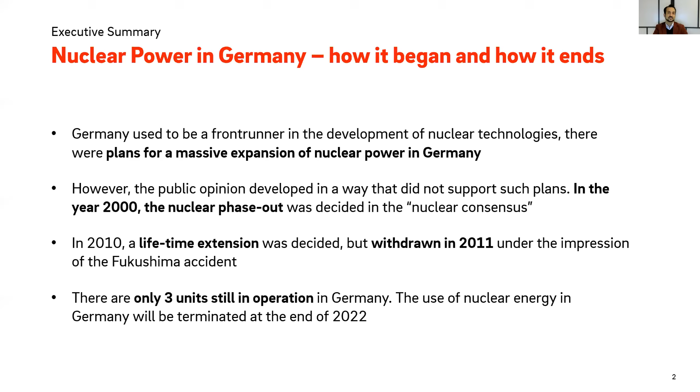I will guide you through the development of nuclear in Germany, and then you will see the decisive points where in Germany other decisions were made than in other countries. But why me? I'm not in nuclear anymore, but I used to be. I used to be at RWE when the most important decisions were made concerning first lifetime extension, and then after the accident at Fukushima, the more restricted phase-out policy in Germany.

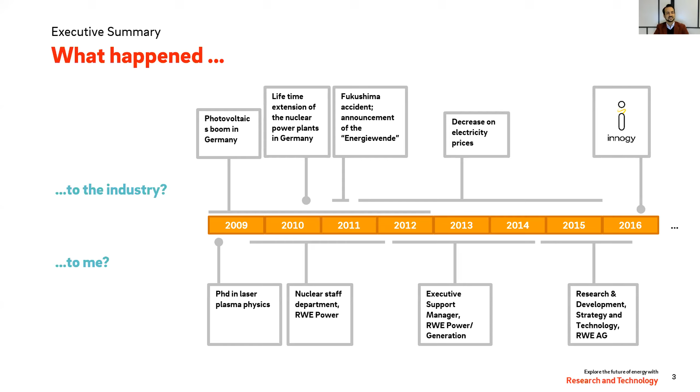And at that time, I did a lot of executive support. I was in a staff department, and I was also executive support manager. So it was a pretty stressful time, but it was also a very interesting and an intense experience. And hopefully I can share a little bit of that today. And I have to say, I'm not a historian, I'm a physicist. So what I'm telling you is mostly from memory. So forgive me if it's not as, let's say, neutral as a historian would do.

But starting at the very early beginnings of nuclear in Germany, I would like to say that Germany used to be a front runner in the development of nuclear technologies and nuclear sciences. I just gave you one example, which is the pebble bed reactor, a design that was pushed forward in Germany. And even though the implementation of that design was, in the end, not successful, as you can see in the middle picture, it still influences the industry today. China has just commissioned a pebble bed reactor in the last year. And they say it's first of its kind, but actually it was done before, especially also in Germany.

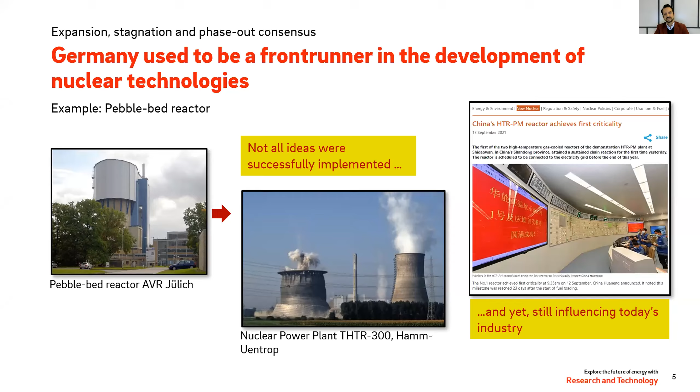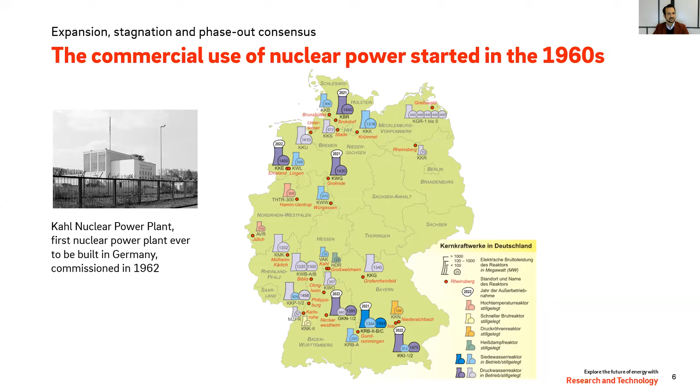And it was not only the science, it was also the industrial development of nuclear power, and the commercial use of nuclear power started in the 1960s. But it was not completely without obstacles. For example, RWE was reluctant to enter nuclear power. We have some historical documents that show that the company was afraid that the overall costs of nuclear energy could not be calculated. So they actually didn't want to enter nuclear power in the first place, but they were pushed by politics. And so they entered this technology, and a decent number of nuclear power plants were built in the 1960s and 70s in Germany. But the decisive point basically came in the 70s in the wake of the oil crisis from 1973.

At that time, there were plans for a massive expansion of nuclear power in Germany. Here you can see former German Chancellor Helmut Schmidt, and his rationale was basically that we would have to go away from oil because of the dependence on imports. And you can see what he said in 1979 here: the burning of any kind of hydrocarbons leads to a dangerous heating of the globe. So he was against the extended use of coal, and he also said that the development of renewable energy sources would not be feasible in the forthcoming 30 years.

And so he said: in 2010, we will no longer have oil, then all cars will run on batteries. For that, we need nuclear power plants so that we can charge the batteries from the socket. And it's really astonishing how similar these arguments from that time are to the arguments that we have today. But you have to take into account that at the end of the 70s, that must have sounded a bit like science fiction to the people. So that was a really intellectual point of view of things. But it was not science fiction. The technology was already there.

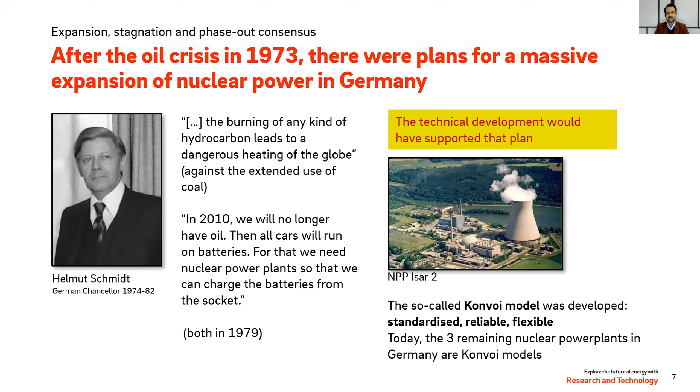But as you know, these plans were not implemented. And why didn't it happen? In the 1980s, skepticism grew in Germany, just like in other countries. But in Germany, it was somewhat more severe than in other countries. In 1979, as you probably know, there was the Three Mile Island accident in the United States. And at that time was also the formation of the Green Party in Germany in 1979 and 1980.

And in 1986, there was the Chernobyl accident. And at that time, there was a growing atmosphere of mistrust. What we saw was that there was a gap developing between supporters and anti-nuclear activists. So on the one hand, you had these elites of politicians, people from industry and from science. And on the other side, you had this grassroots development.

And the people from this grassroots development were not really seen as equals in the discussion because they were no experts. And that caused, let's say, this trench to grow, and we had this polarization in Germany. For example, as you can see here on this image from 1986, excessive police force was applied to activists. From today's point of view, this image looks really disturbing. But it also shows how the polarization in the society grew. And that was a mistake.

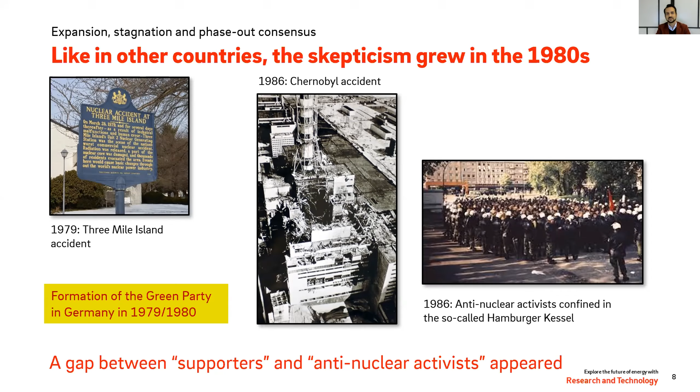So when the Green Party was in the federal government for the first time in 1998, it was finally negotiated how the nuclear phase-out in Germany could be done. At that time, the government put a lot of pressure on the nuclear operators, because the government could have prevented continuing operation of nuclear power plants just by not giving permits, for example, for nuclear waste transport. So they could have just stopped the operation by not giving permits. And that, of course, put a lot of pressure to finally have this consensus negotiated with the nuclear operators.

And this consensus was actually quite a piece of work. It was a smart idea to do it in the following way. The power plants in Germany received a certain amount of electricity that they were still allowed to produce until the end of their operation. So each plant could produce a certain amount of electricity, and when this electricity was used up, it would automatically lose its permit for power operation, and then it was over. That was more or less irreversible, because applying for a new permit for an old plant is usually not possible. So once you lose your permit, it's over.

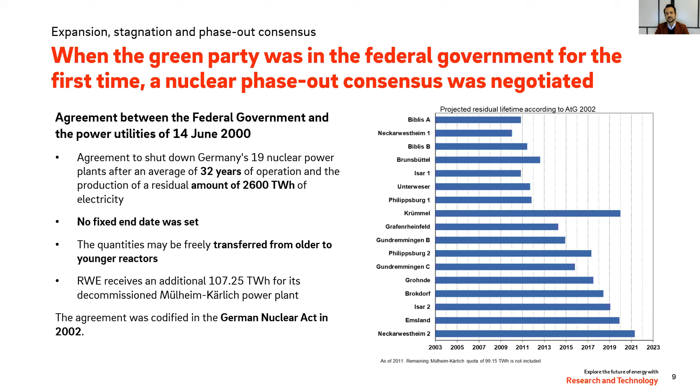So it was only that, as we see in the next chapter, the government changed over time, and at some point decided to have a lifetime extension, just to buy a little more time for the nuclear power plants in Germany. The idea was never to revive the nuclear industry in Germany or to build new plants. It was just to make the transition into a renewable future easier, for three reasons, basically. The first one being the nuclear power plants would facilitate CO2-free production of electricity. Second, they could keep electricity prices at bay to some degree.

And the third one is that the extra profits from the continued operation of the nuclear power plants could partially be used to finance support for renewable projects or climate protection projects. About half of the additional profits would have been transferred to the government, to governmental funds, and these funds could have been used for climate protection purposes. So that was the idea, just to facilitate this transition. And that was also the time when I started in the nuclear industry.

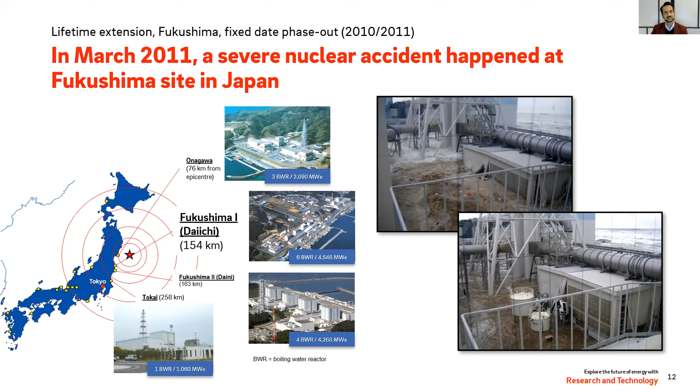And so the question was, how did that affect Germany? And it did, although obviously we do not have tsunamis in Germany. There was a perceived urge to do something about nuclear energy in Germany as well. And the immediate action of the authorities and the government was that they halted the operation of 8 nuclear power plants, which was called atomic moratorium, if you like, and did a safety assessment of all of the nuclear power plants in Germany.

Of course, it was actually surprising that you would halt the operation of nuclear power plants in Germany because of an accident that happened in Japan that was not transferable. But at that time, it was like this, and these 8 power plants didn't start operation again because there was a renewal of the German Atomic Act, which then fixed the dates of the shutdown of the individual power plants.

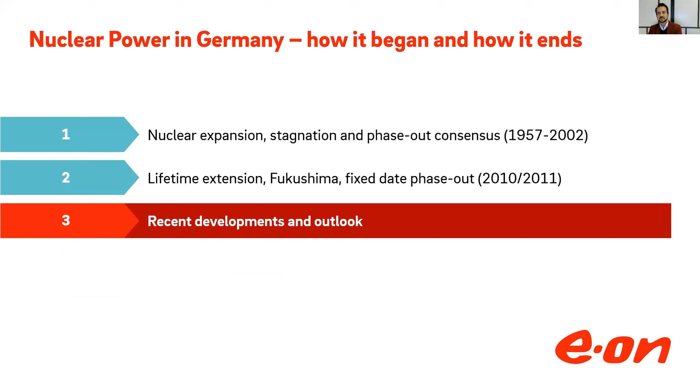And so the activists focused on other topics, especially on lignite in Germany, and you could see really very fast that they changed from one side to the other side, and there was this occupation at the open cast lignite mining plant. And this, of course, is an ongoing topic in Germany. Yes, so that was it basically for, let's say, the wild days of nuclear power in Germany. And so the dust has settled more or less.

And in Germany, we already have sorted out most of the connected problems. So the utilities have adapted their organizational structure already with respect to remaining operation, decommissioning, and dismantling. Then the financial responsibility for the disposal of nuclear waste was transferred to the federal government through a one-off payment. And so that is now secure for the operators. And the process for the preparation of a final nuclear waste storage was defined by law and also by a commission, and this process is now being executed. Of course, it takes some time, but at least we have a process to do that.

And also compensations for the nuclear operators have been regulated by court rulings, by legal adjustment, and last year, finally, by an agreement for a payment of 2.4 billion euros, which was then basically the end of the story. And so that's it. Things all have been regulated, and just as I said, the wild days are over, and it is now all becoming a bit calmer about this nuclear discussion, because in principle we have sorted out most of the problems. So that's it from me.

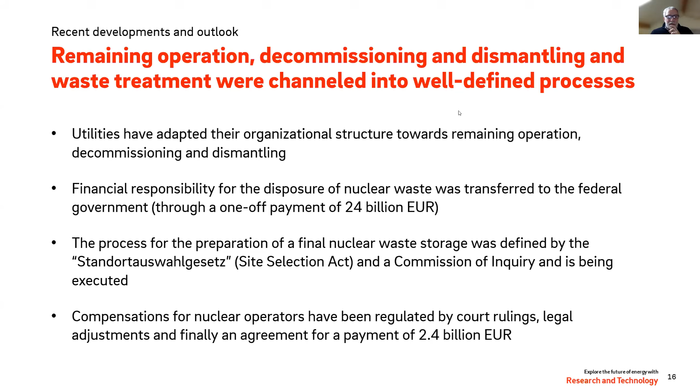Okay. Yeah. Very good. Should I continue? There's another comment. It said maybe it's better to wait for the discussion time for the second question. Okay. Okay. So Vincent, I think it's... Thanks very much, Monique, for your interesting presentation and the insights. Yeah, okay, definitely.

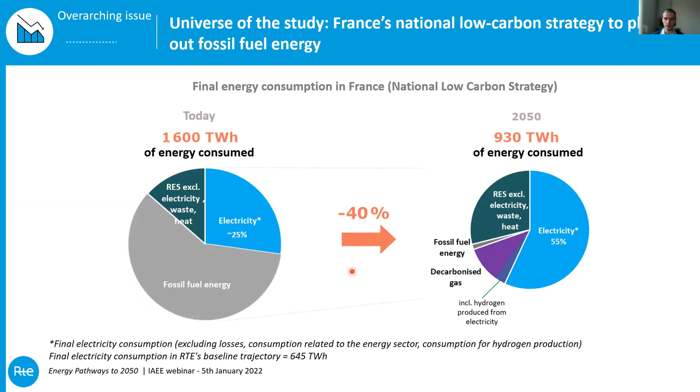So a major decrease of total energy demand in France is expected. It's not the specific figure which is important, but nevertheless, that's the major framework. So that's the first challenge, which is to decrease this amount. And as you can notice, there is one important type of energy whose share is called to increase, which is electricity. There's also a question with regard to biomass, but as the French electricity TSO, since we are in charge of security of supply in our system, we need to look at the share of electricity, which is largely expected to increase.

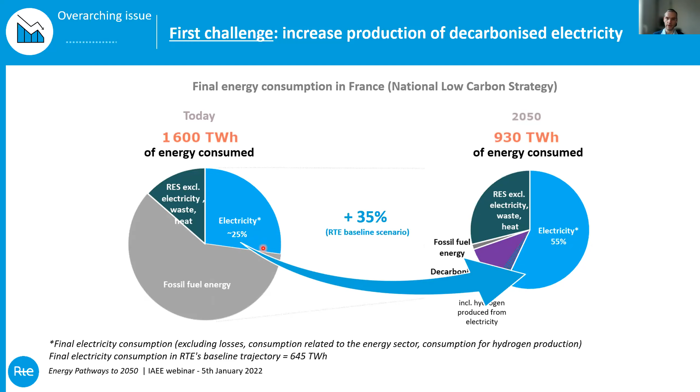So we are in a situation where the overall amount of energy is called to decrease, but the overall amount of electricity consumed is called to increase by more than 1/3. So that's the very first challenge for the electricity system. The second challenge, which is related to the very topic of today, is the replacement of the second generation nuclear reactors that we have in France.

They were mainly built in the 80s, during the decade between the 80s and the 90s, as you can see here. So you have a graph with the installed nuclear capacity in France, which is some kind of sigmoid function. And if we take into account that these generators could have a lifetime of 50 years or 60 years, which is the two dotted lines that you can see here,

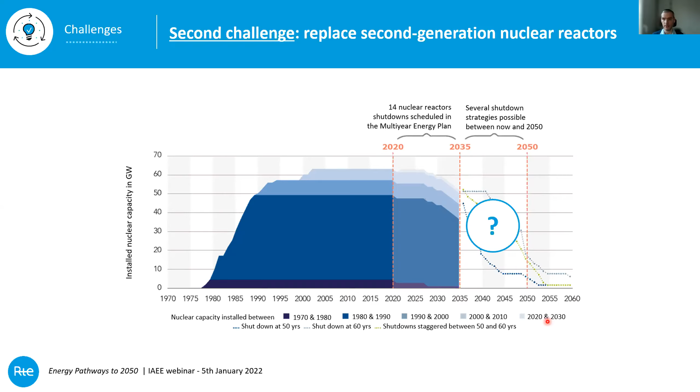it's quite obvious that in 2050, or even if you look at the longer term in 2060, there is the question of the replacement of this nuclear fleet, and the question of with which type of capacity we will need to replace this very capacity, which stands today for 70% of the electricity produced in France. So, which is a major lever of decarbonation of electricity right now, and also in the future, when we consider that other energy uses could be decarbonized by electrification.

So we have conducted a study that we published recently in October last year, looking at very different analysis axes: technical, economic, environmental, society. I will focus today on a bit of technical, a bit of economic. It was a work conducted under a wide consultation process with more than 100 organizations represented, with a lot of technical and plenary meetings. For the moment, it's available in French, but the executive summary is being translated and should be available in English and also possibly in German quite soon.

So just to give you a broad overview of the model, and possibly if there are questions later on, I could enter more into the detail. We have made a European model, which is a classical model that TSOs use in Europe for security of supply analysis, which is a simulation of supply-demand balance on an hourly basis, and also taking into account that we need to have economically efficient investment, in particular in flexible capacities.

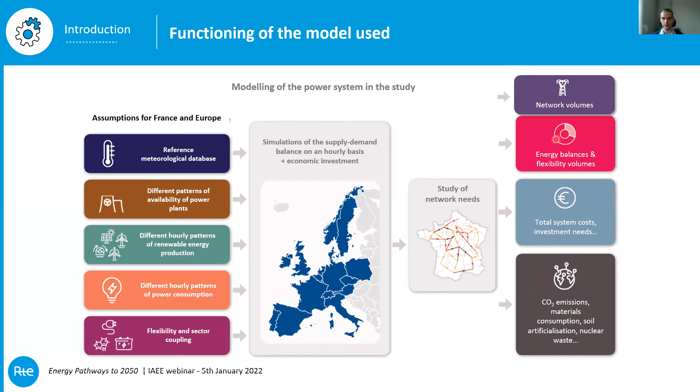And thanks to this analysis, we could have an analysis on different dimensions: technical dimension, economical dimension, but also environmental dimension. I will focus on technical and economical dimensions. So for consumption, I already mentioned it previously. So we built the trajectory. It's not something that we decide. It's a bottom-up analysis, analyzing the different usages of electricity and how they can evolve in time, considering in particular energy efficiency, but also electrification.

And in particular, because of electrification of different sectors of mobility, but also higher electrification of industry, but also for the production of hydrogen, we see, as was mentioned previously, an increase of electricity consumption, which is shared by the whole French energy stakeholders, an increase compared to today by 1/3 in the baseline trajectory. If we also take into account sufficiency measures, we still see an increase in the power load compared to today. Today we are around 480 terawatt-hours, so it's an increase of 70 terawatt-hours or something like that.

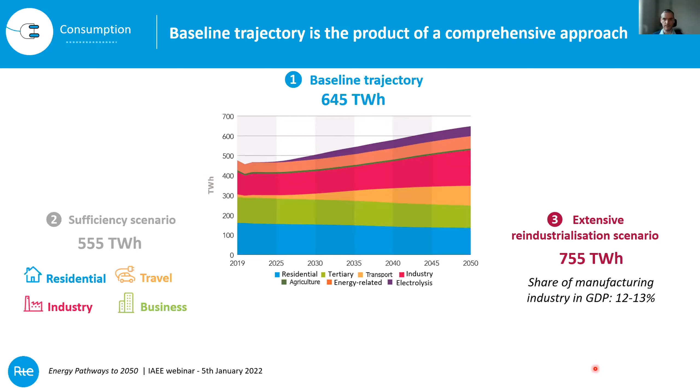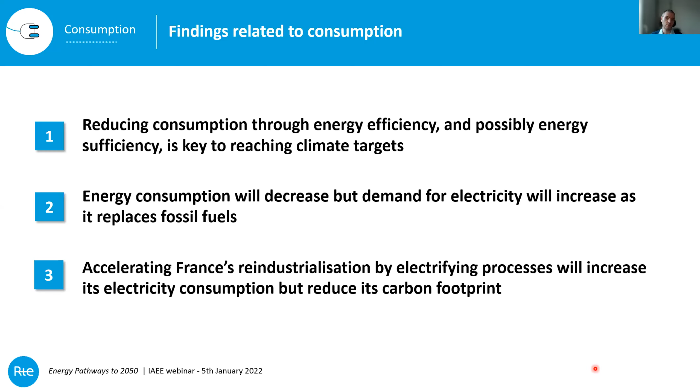So these are takeaways that I've already mentioned: for reducing consumption, it will be needed to rely on energy efficiency and also possibly on energy sufficiency in order to reach the climate targets. The energy consumption will decrease, but the electricity consumption will increase. And if we accelerate French reindustrialization, mechanically, it will increase electricity consumption, but at the same time, it would reduce the carbon footprint, avoiding CO2 emissions elsewhere in the world.

So for the transformation of the mix, the whole consultation process leads us to consider two types of scenarios and three scenarios for each. So scenarios in which we end up without new nuclear, and so at the end there would be 100% renewable, either in 2050 or in 2060, but with different mixes of renewables. As you can see, this renewable mix relies more on PV, in particular on distributed PV here, whereas the other renewable mix here rather relies on large power plants.

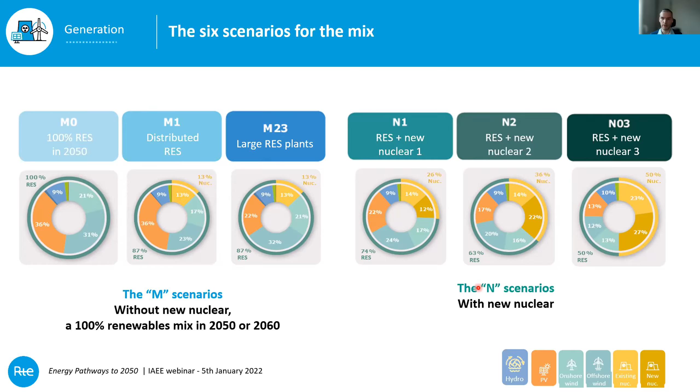And the other set of scenarios is scenarios in which part of the existing nuclear fleet is replaced by new nuclear reactors. I insist, part of it; you will see that we do not replace all the existing nuclear capacity, even in these scenarios that include new nuclear reactors. So just to give you a broader understanding of those scenarios, we have different trajectories.

In particular, I will begin with the higher level of nuclear capacity that is expected to be installed. Just to give you an idea, here is the historical nuclear power development that was experienced by the French power system, for comparison with this trajectory. So this higher trajectory could be seen as not very high, but nevertheless, that was the highest industrial capacity that the nuclear actors said was feasible. So we have taken it.

At the end, by 2050, it would stand for 50% of the electricity mix, but it was not the target researched. That's a consequence of the industrial constraints that the nuclear actors told us would be reasonable, considering their ability to develop capacity. And then we have the two other trajectories, and we end up with a share between, let's say, 25 and 50% for nuclear capacity.

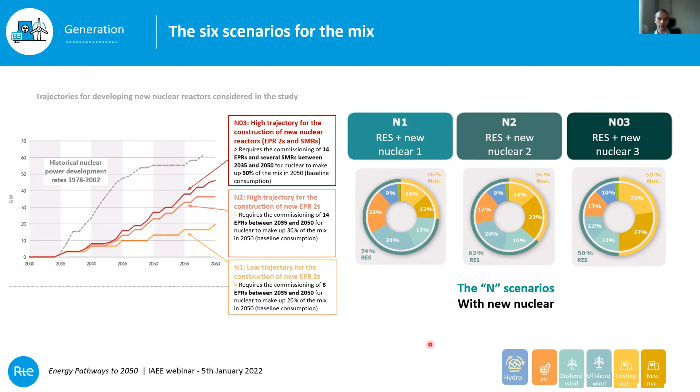And then, considering these scenarios and the need for electricity consumption, in all of those scenarios, we need renewables in order to have the overall balance. Now, if we focus on the renewable scenarios, what is important is to compare the required renewable development rates with historical rates, either in France or elsewhere in Europe. So that's what is illustrated here. So you have photovoltaic, onshore wind, offshore wind, and you have the required development rates in the different scenarios, compared with the historical development.

Sorry, I don't see completely because of Zoom, this part.

And what you can see here, what is very important, is that in order to reach the required development rate for renewables, we will have to reach, on average, some of the development rates that were historical records, either in France or in other countries, depending on the scenarios we are considering. So this means that it will be very demanding in terms of renewable development in those scenarios. That's quite obvious, but it's quite important to mention it, with significant, concrete measures.

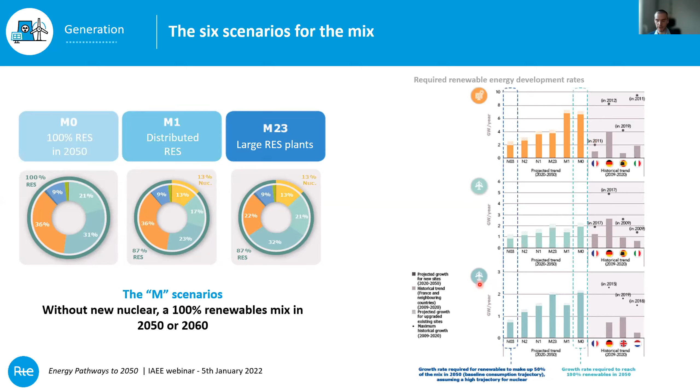So I've already mentioned those two conclusions, and just to conclude, if I still have a bit of time, just to give you an idea of the economic analysis we have conducted on those scenarios, taking the figures for 2060. So we have compared the scenarios on different dimensions. First of all, we have compared the overall production cost, considering renewable and nuclear only and disregarding other matters. Then, if we compare the different scenarios, we see that in particular this renewable scenario, M23, is cheaper than the other scenarios with nuclear.

But in this scenario, we don't take into account that we need flexibility in order to cope with the variability of renewables. When we take that into account, this flexibility, so the need to have peakers, the need to have batteries, things like that, and also the fact that we need to have energy to run them, this energy coming in particular from electrolysis of water in order to have hydrogen. When we add up the cost of flexibility,

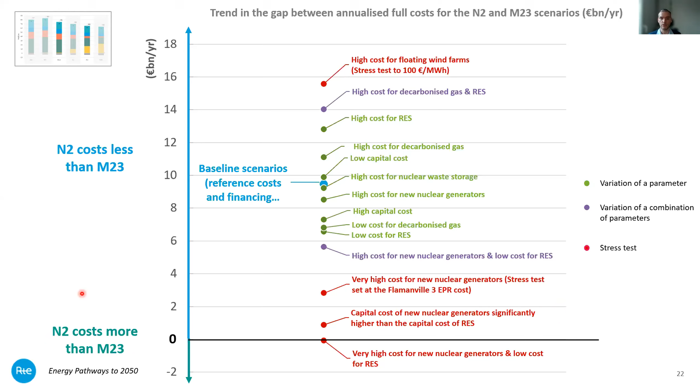And what we have concluded is that even considering very stressed situations, in particular for the cost of nuclear, well, there are very few configurations in which renewable scenarios are less costly than scenarios with at least a bit of nuclear, in order to have a set of dispatchable capacity. But it also opens other kinds of questions that we are still working on, and also other dimensions that we have looked at, in particular the environmental dimension, or also societal dimensions, that I would be happy to discuss with you then.

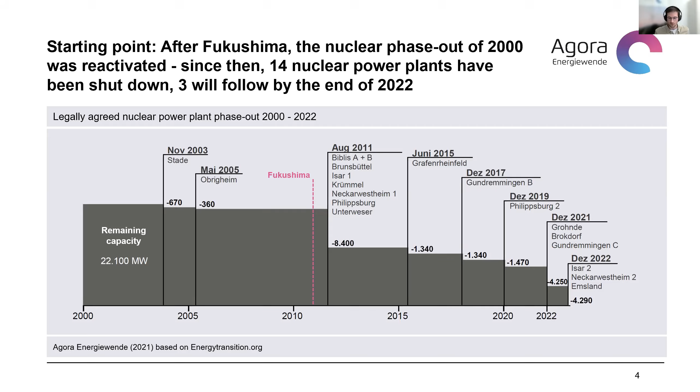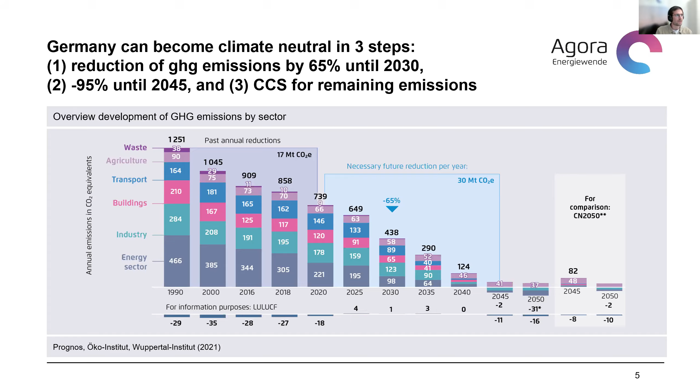And those will be offset by negative emissions. And in our scenario, that is by the utilization of BECCS, bioenergy carbon capture and storage, DACCS, direct air capture CCS, as well as the use of green polymers in the industrial sector. So much as an overview in terms of greenhouse gas emission reduction of the scenario.

Now, let's look at the 5 central strategies, and I will focus primarily on the power sector for our discussion today. The first strategy was and is the increase of energy efficiency. And you can see here the primary energy consumption between 2018 and 2045. And you can see that we will see, at least in our scenario, a considerable decrease by around 50%. And the share of renewable energy will increase dramatically, if you include PTX imports here in light blue, to around 97% in 2045.

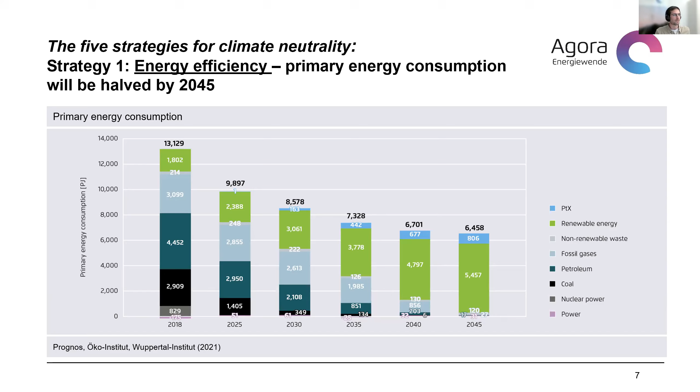And the reduction of primary energy consumption is primarily driven by energy efficiency gains across sectors, but in particular in the building sector, where retrofits and efficient appliances even outweigh the introduction of, I think in our scenario, we have 14 million heat pumps.

Now, the second strategy, not surprisingly, is the rapid expansion of renewable energies, in our scenario towards 70% renewable energy share in 2030 and 100% by no later than 2045. In terms of installed capacity, you see on the left side that renewable capacity will have to increase by at least a factor of 5. And in terms of net power generation, the biggest contribution eventually will come from PV, followed by onshore wind and offshore wind.

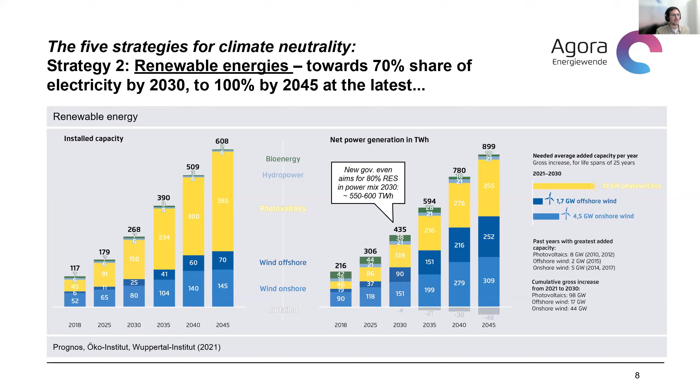And despite the fact that our scenario is already quite ambitious, you can see in this call-out box that the newly elected government is even more ambitious, at least according to the coalition treaty, aiming for 80% renewable energy share by 2030. They have a slightly higher electricity consumption value for 2030. And so that translates to around 550 to 600 terawatt hours of net power generation in 2030, which is, and we'll see that on a later slide, extremely ambitious.

But what is also very important for the German discussion is that we have also legally agreed on a coal phase out by no later than 2038. In our scenario, however, lignite and hard coal are already driven out by 2030 by the market as a consequence of both rising ETS carbon prices and low gas prices. Now, the latter part, the low gas prices part, is a little bit at odds with what we see in the current energy crisis and in the current market. And I'll come to that later.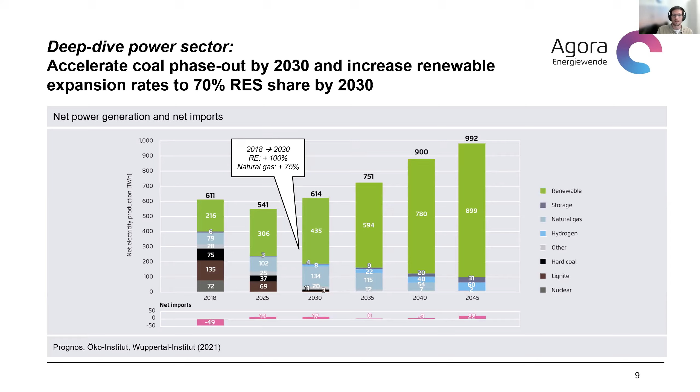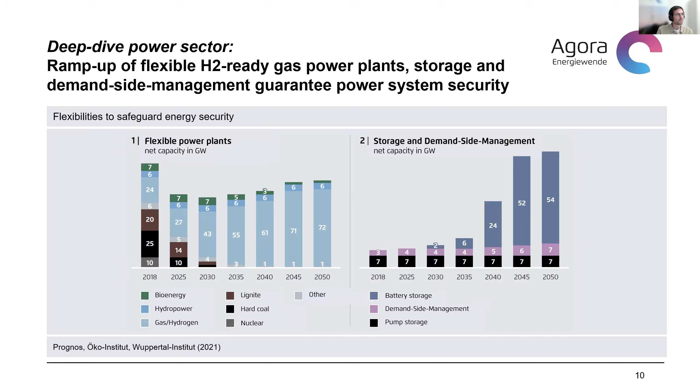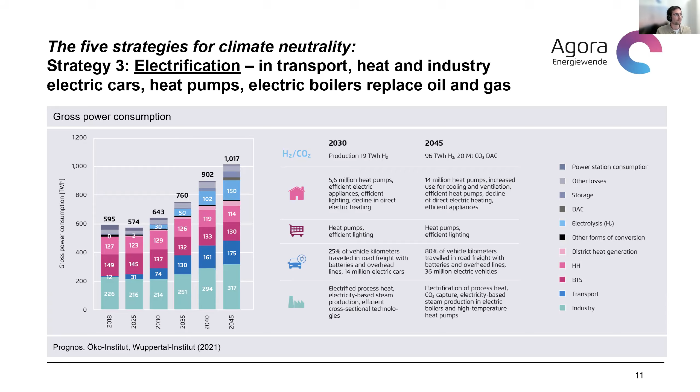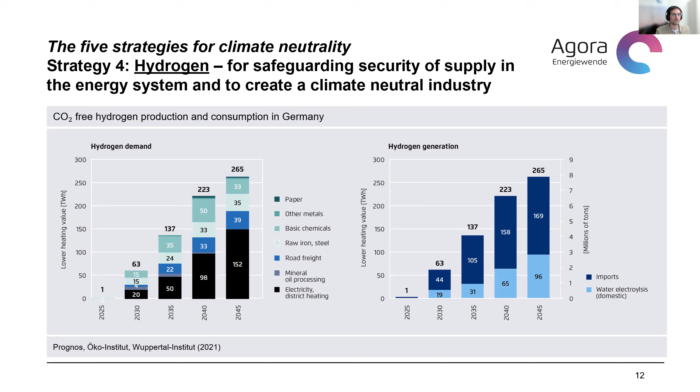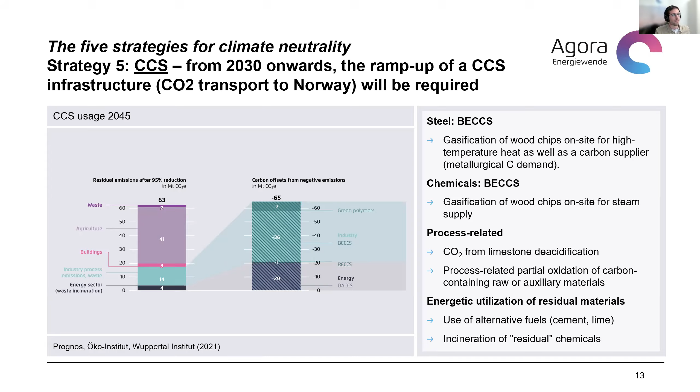emissions. And in that scenario, that happens in the industry sector through the use of bioenergy carbon capture storage, as well as in the energy sector by the use of direct air capture carbon capture storage, to offset these residual 5% of greenhouse gas emissions. So much to the 5 central strategies.

Let us just discuss 2-3 challenges that I see, especially in the context of the current energy crisis and also the discussion around nuclear. So how will nuclear and coal in the German context that will be phased out be compensated? We talked about it now, and the short answer is ramping up renewable energies and ramping up flexible gas power plants that will be gradually run with renewable hydrogen.

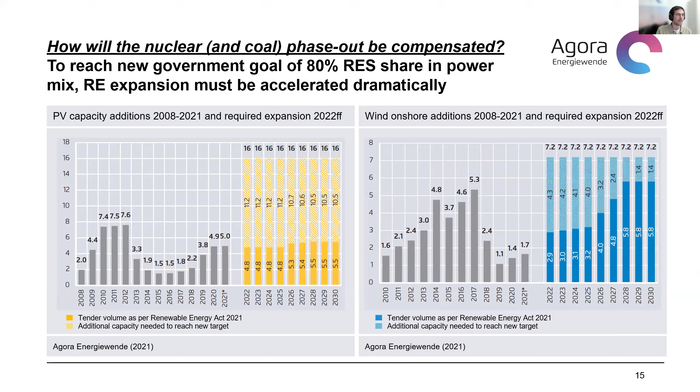The success of the German energy transition hinges on the uptake of renewable energy, and it's to be seen whether the German government can create the political and legal conditions to really manifest such an increase. In any way, we will see an increase in gas capacity and gas-based electricity production.

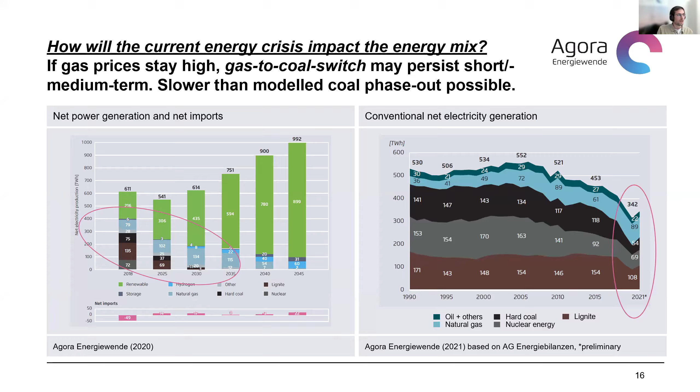And yeah, ending on a positive note, I think Germany has the chance to continue to make the energy transition, the German Energiewende, successful. But as you could see, it really hinges on the question how fast renewable energy can be ramped up now. Otherwise, the climate results and the greenhouse gas balance of the next years will not be in line with what the German government has legally agreed to do, and we'll see how that works out.

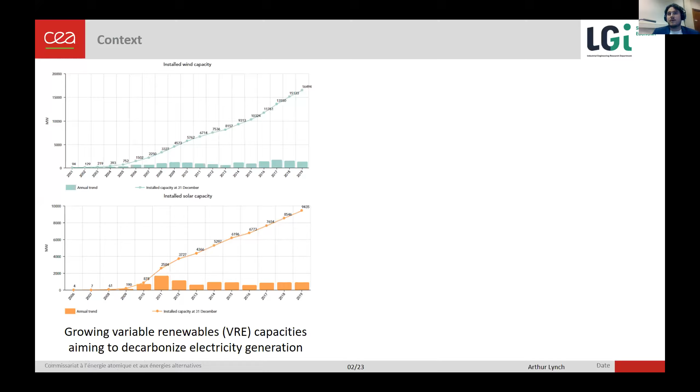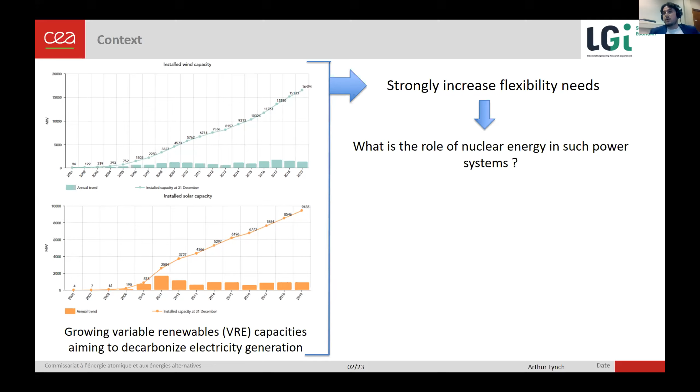But the fact is that in France, and of course in Germany it was also the case, we will be installing more and more variable renewable capacities in the electricity mix. And this will create a system with strong flexibility needs. And in this context, the real question is to know what is the role of nuclear energy in such a power system. So nuclear energy, to accommodate variable renewable capacity, will need to be more flexible than it already is in France. And the question is to determine how modelers should represent nuclear in such future studies. So of course, there were questions that motivated this research.

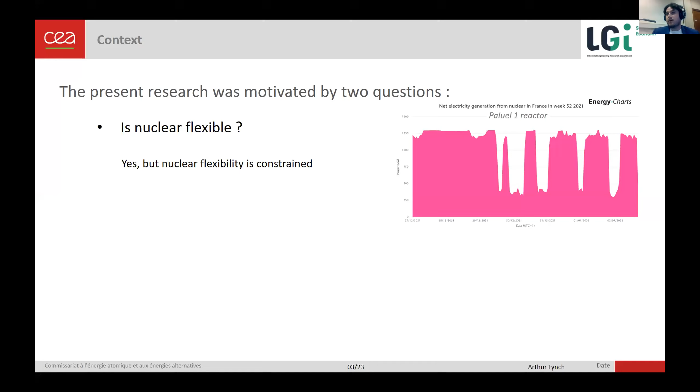The first one was to determine whether nuclear is flexible. And of course, in France, nuclear has a history of being flexible with, of course, some constraints. Nuclear energy is still less flexible than other thermal means of generation, I mean. I gave you this example just from last week from the Paluel 1 reactor, that needed to ramp down due to low electricity consumption due to low economic activity because it was a vacation. So we can see that nuclear in France can be flexible in a really short time and may accommodate some part of the variable renewable intermittency.

The second type of question behind this research was how should we model this flexibility? Modeling nuclear flexibility constraints in a simulation model has a toll on the computational time. So it is really important to determine whether it is necessary to represent it in such a simulation model because it may hinder the simulation process.

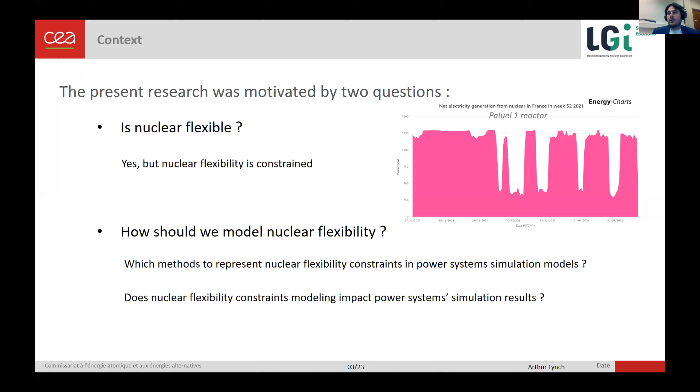So what we did after that was to determine which kind of flexibility limit we want to represent, and we chose to focus on two main flexibility limits. The first one being maintenance and refueling outages. Looking at the modeling literature, we found that this is a

flexibility limit that is often overlooked, and it refers to the fact that after refilling the fuel, nuclear reactors start their irradiation cycle for several months, 12 months or 18 months or 24 months, depending on the electric system and the strategy of the plant manager, and then need to stop to do some maintenance or refueling outages that last for several weeks. The fact that these outages last several weeks is a structural characteristic of nuclear production and nuclear flexibility and may need to be taken into account.

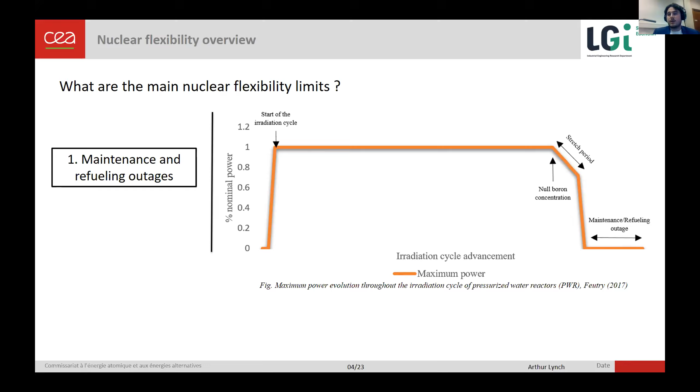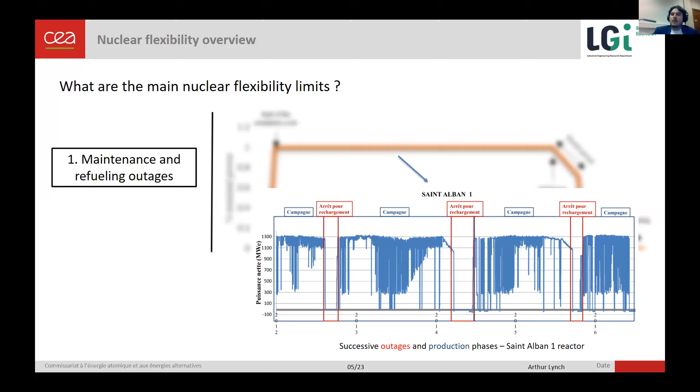The second type of flexibility limits that we decided to look at is minimum power variation. We chose to focus on that because in the modeling literature, we found that minimum power is often represented as constant. And looking at nuclear physics, at least for pressurized water reactors, it is not the case at all. At the start of the irradiation cycle, we find that nuclear reactors have huge flexibility capabilities, and they can ramp down from 100% of the nominal power to 20% of the nominal power.

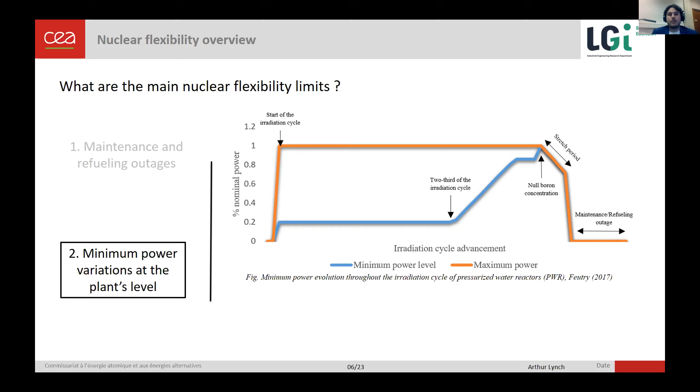And starting from 2/3 of the irradiation cycle, this minimum power starts to increase, and the flexibility capabilities of reactors start to decrease. So it is really important when we want to assess the available flexibility of a nuclear power plant to know what is the state of each reactor in their irradiation cycle. If we look at this same plant that I presented to you before, we can clearly see the fact that this minimum power starts to increase. So this is really a structural feature of at least French nuclear power plants.

Maybe you will ask yourself why in this working paper we did not take into account ramping constraints. Ramping constraints in nuclear reactors range from 2% of nominal power per minute to 5% of the nominal power per minute, meaning that nuclear reactors are less flexible than other means of generation, such as gas or fuel plants. But the fact that we don't take into account this ramping constraint is linked to the fact that we only focus on hourly time step simulation models.

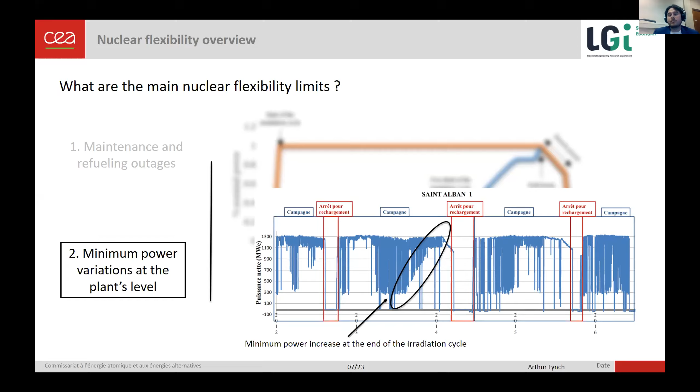And in France, the dynamics are to have a high nuclear availability during the winter and lower during the summer, due to the fact that there is higher electric consumption during the winter for heating needs. Of course, another thing that we take into account in our model to represent maintenance and refueling outages is each reactor's constraints, so irradiation cycle length and outage length. But we also take into account all the parameters that really condition the nuclear schedule optimization process in reality, such as workforce limitation. You cannot stop all reactors at the same time due to safety or to workforce limitation.

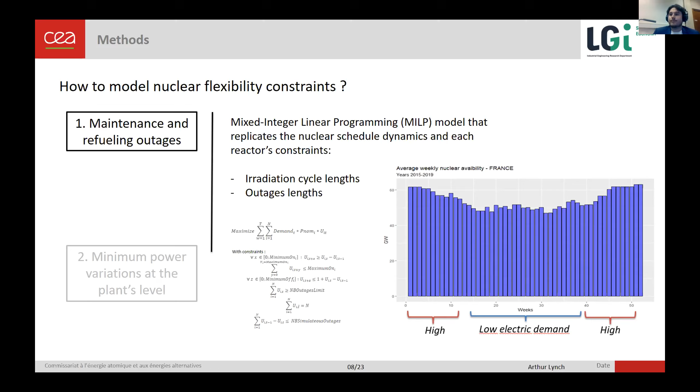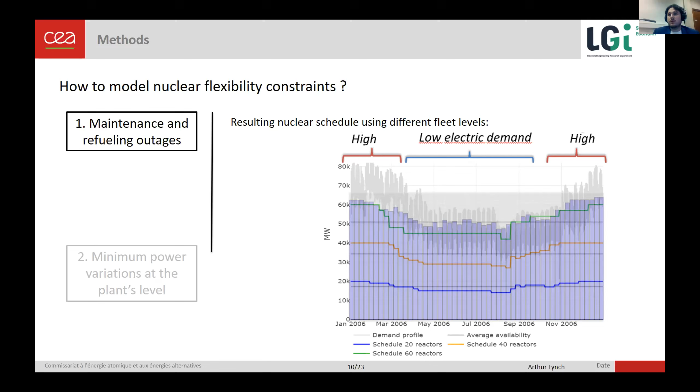The second flexibility limit that we implement in our model is, of course, the minimum power level variation. Once we optimized the nuclear schedule, we can know when reactors start the irradiation cycle and when they stop the irradiation cycle. So starting from that, we can evaluate the advancement of each reactor in the irradiation cycle. Thus, we can compute the related minimum power level variation according to the advancement.

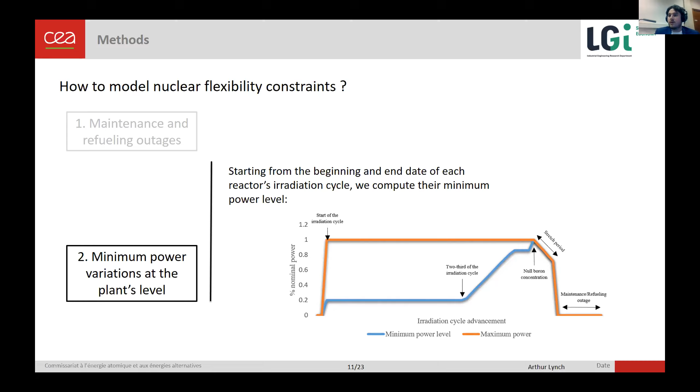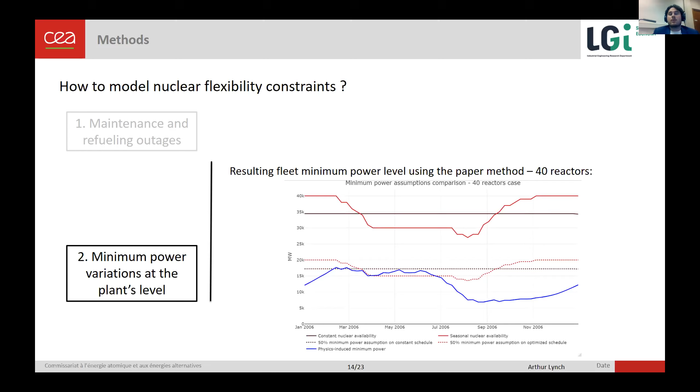So now that we determined how to represent nuclear flexibility constraints, we want to make sure that implementing those flexibility constraints in a power system simulation is worth it. So what we did is compare 3 different nuclear flexibility modeling cases. The first case being the base case, case A, where we consider that nuclear flexibility modeling is simplified with a constant nuclear availability and a constant minimum power.

The second case, case B, is an enhanced nuclear flexibility modeling, where we optimize the nuclear schedule but keep the constant minimum power assumption. By doing that, we will first compare case B to case A in order to evaluate the impact of optimizing the schedule of the nuclear fleet, both on the power system simulation result, but also in real life.

And lastly, the last case is what we call a realistic nuclear flexibility modeling, where we take into account an optimized nuclear schedule, but also a realistic minimum power variation. And by comparing case C to case A, we can see the impact of modeling the full constraint of nuclear flexibility on the power system simulation result.

Of course, we know that modeling nuclear flexibility constraints will not be of the same interest depending on the capacity mix studied. So what we did is have 15 different sensitivity cases with 5 different variable renewable penetration scenarios and 3 different nuclear penetration scenarios. We will be able to determine in which cases it is worth it to integrate nuclear flexibility constraints in our power system simulation.

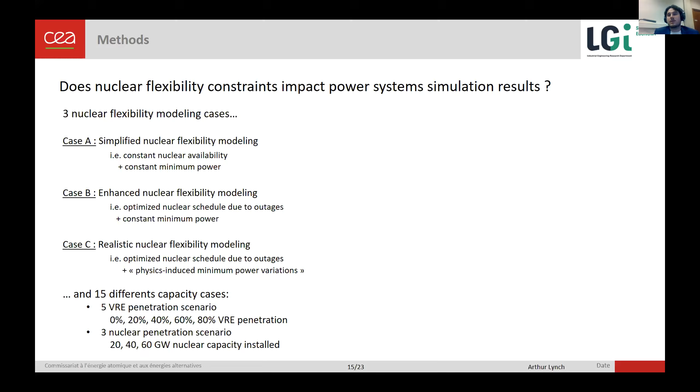We run our analysis on a simplified power system simulation. Contrary to the studies presented by Vincent before, which was a European study, we only simulate one country, France. The goal will be, in a later paper, to have a European study. But for this study, we only consider one country. We also consider one weather year.

We chose 2006 because we found in the literature that it was the most representative weather year for renewables, and only a few generic technologies because we did not want to complexify the model and only focus on the interaction between variable renewable energies and nuclear. And of course, because we only focus on one country, there is no interconnection. So we run our 3 cases in our 15 different capacity scenarios and we compare the results.

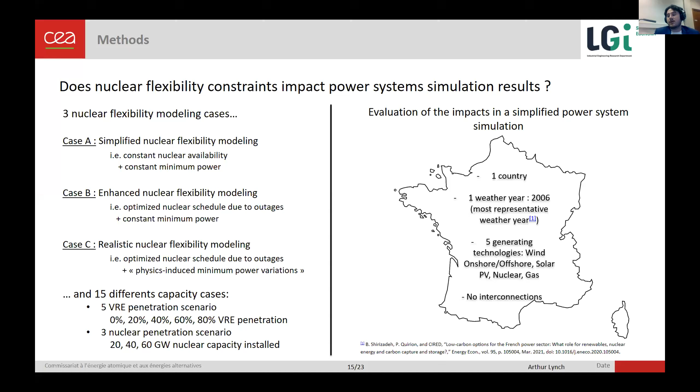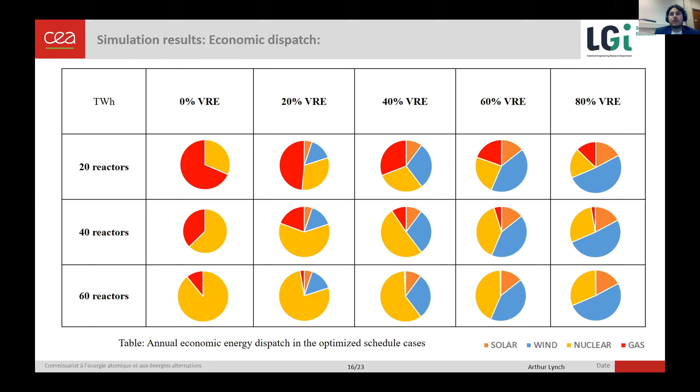The first comparison that we did was about operational cost and the impact of modeling nuclear flexibility on the estimation of operational cost. So the first comparison is between case B and case A. So what is the impact of nuclear schedule optimization on simulation results, but also real life?

So what we found is that if we optimize the schedule of a nuclear fleet, we have a decrease in the estimation of operational cost. And this decrease is higher when we have a high number of nuclear reactors, but also deep variable renewable penetration. If we try to assess the impact of representing minimum power variation, we find that it further decreases the estimation of operational cost. And thus, it seems important to take into account this aspect.

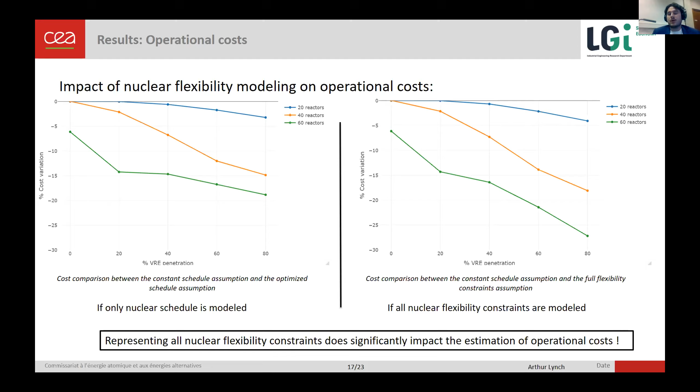What we can say when we look at the comparison of those 3 different cases regarding the estimation of operational cost is that it seems quite important to represent the nuclear flexibility constraint in a realistic way in order to have a good estimation of a future power system with renewable energy and nuclear. The second type of characteristic that we try to look at is, of course, direct CO2 emissions.

Due to the fact that we need to reach carbon neutrality, it is quite important to determine the effect of nuclear flexibility on direct CO2 emissions. So the impact of optimizing the nuclear schedule was a decrease in CO2 emissions. This is linked to the fact that by having more nuclear flexibility available for the power system simulation, we have a lesser need for gas to balance demand and supply, meaning that it directly decreases the CO2 emissions. And this effect of nuclear schedule optimization is also greater as we have more reactors in the capacity mix and more variable renewable energies.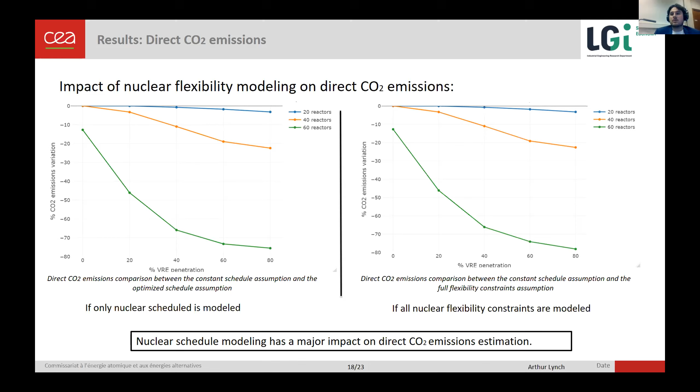We tried to look also at the impact of modeling minimum power variation. And what we found is that the additional impact of representing minimum power variation does not really impact the direct CO2 emissions of the system. So what really defines the fact that direct CO2 emissions decrease in our models is the fact that we optimize the schedule, but minimum power variation consideration is secondary. So that's the message related to CO2 emissions.

The last main type of result that we try to assess is linked to energy curtailment. Why did we look at energy curtailment? It's because it is one way to measure variable renewable energy integration in the power system. And what we found is that initially, especially in cases with a high share of variable renewable energies, we have quite significant levels of curtailed energy, which of course can be managed, but is a problem in terms of economics and optimality. When we optimize the nuclear schedule, we find that it decreases the estimation of energy curtailment, meaning that optimizing the nuclear schedule does decrease the energy curtailment of variable renewable energies.

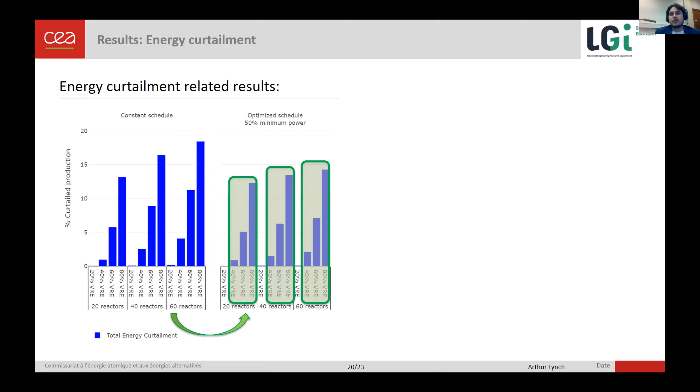And this is mostly due to the fact that because we have higher nuclear availability during the winter, but lower during the summer, the solar production that is really high during the summer is less curtailed. Of course, this effect of the nuclear schedule is not significant when we have a low variable renewable penetration, but only when we have variable renewable energy penetration higher than 40% of the electric demand.

If we try to assess the additional impact of minimum power variation, we find that it further decreases energy curtailment. And because we have higher nuclear flexibility capabilities, it reduces the curtailment of variable renewable energies. Once again, this effect is only significant when we have more than 40% variable renewable penetration of the electric demand.

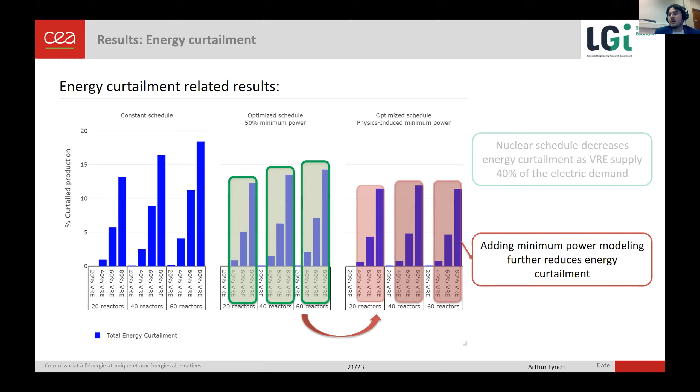We have other results, but I don't think I will detail them a lot because we ran out of time. The first other result is linked to gas output. In all of our cases where we have higher nuclear flexibility, the overall gas production does decrease. This is due to the fact that our system, because there's no interconnection taken into account, has a really huge need for flexibility. And when we have higher nuclear flexibility available, then gas is less needed to balance demand and supply.

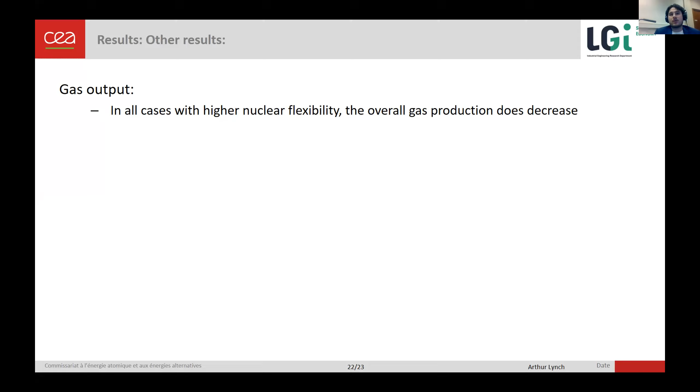Another result is linked to market prices, which is quite important, especially in cases with a high share of variable renewable energies. Nuclear flexibility does decrease the occurrence of negative price hours in all of our cases. I want to put an emphasis on that because as we integrate more and more variable renewable energies in the capacity mix to decarbonize, we have seen a rising occurrence of negative price hours, which is a big deal in terms of the economic viability of generating assets in an energy-only power system.

Another result linked to market prices in the working paper is linked to the fact that because we have reduced gas production in some of our cases, especially cases with high nuclear capacity and high variable renewable energy penetration, we find a decreasing occurrence of peaking prices, which further decreases the economic viability of some generating assets.

The last type of result present in the working paper is linked to technology revenues. We have increasing technology revenues due to the decreasing occurrence of negative prices, which really shows the beneficial effect of using nuclear flexibility to accommodate variable renewable energies on technology revenues. So in the case of hybrid markets, using nuclear flexibility may decrease the interest of mechanisms such as capacity mechanisms or other measures that aim to support generating assets.